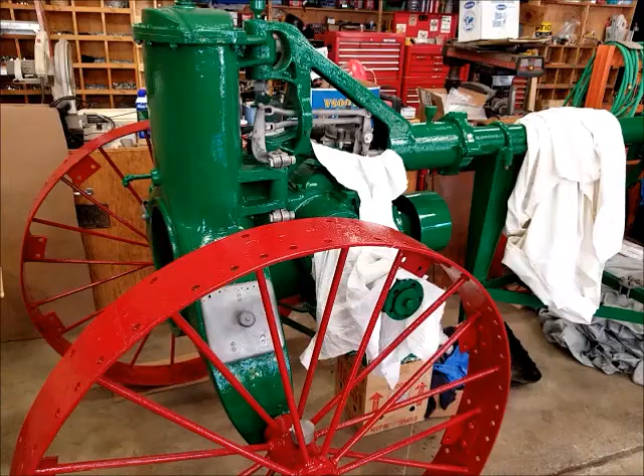So that means back to working on the 612. I got some updates for you. I've heard news that my buddy Kyle is working on these final pinion drive parts for me, and he's hoping to wrap them up in the next week or two here and get them shipped off to me. So that'll be good news, we get them back, we'll be able to install that.

I've been working on rounding up a few more things. I got the new radiator hose in. I ended up going with the red because I think that'll look pretty sharp against the green, little contrast and a little bit something different. It's actually more of an orangey than it is red, but that's the vintage color I guess they were. So I think that's pretty cool. I got a chunk of that.

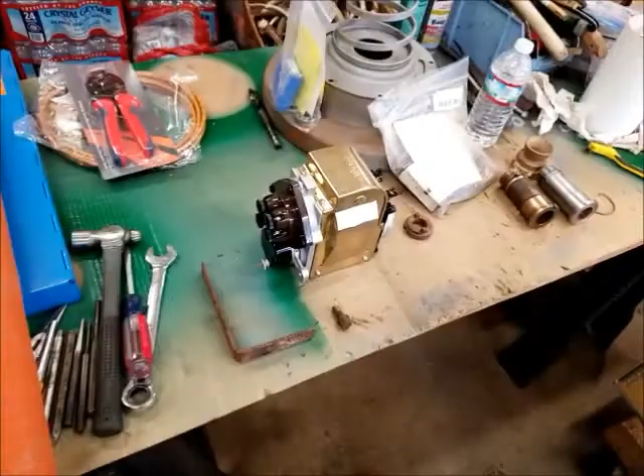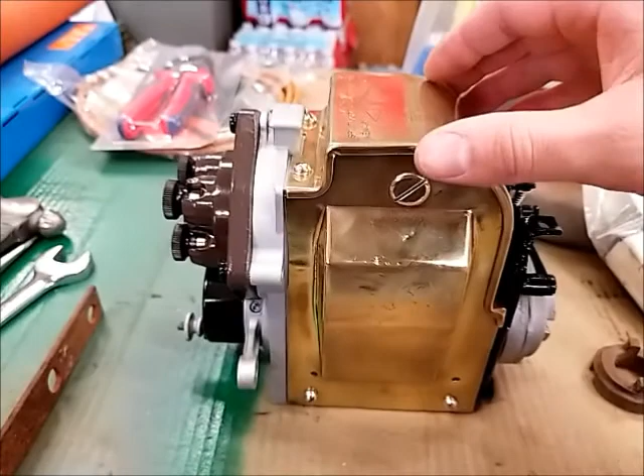Really exciting news, I got my Magneto back from Matt Scott here the other day, and boy does it look nice. Good job, Matt, I am so happy. He completely rebuilt it for me, polished the brass, clear coated it, sandblasted or bead blasted the rest of it, and painted it.

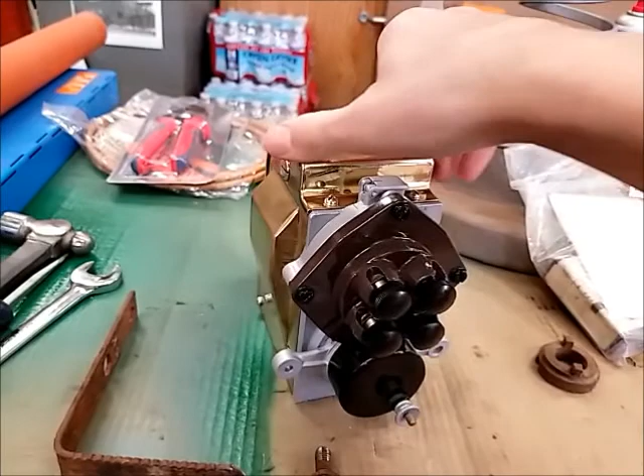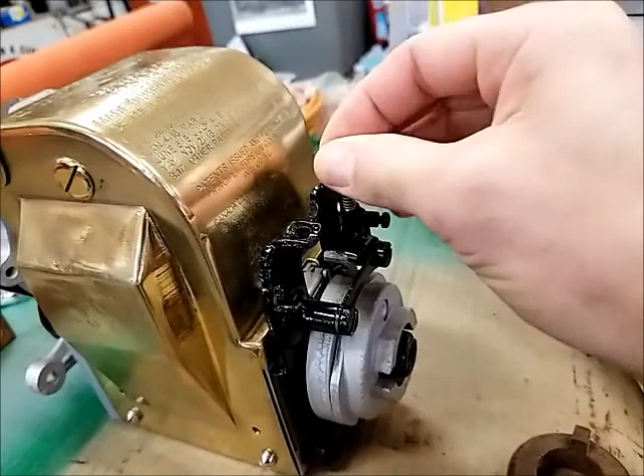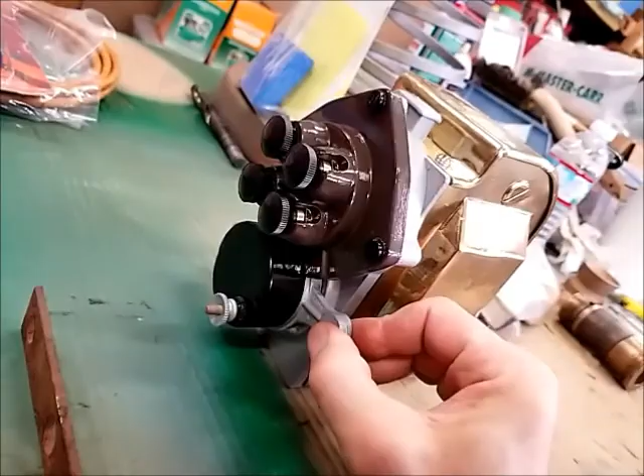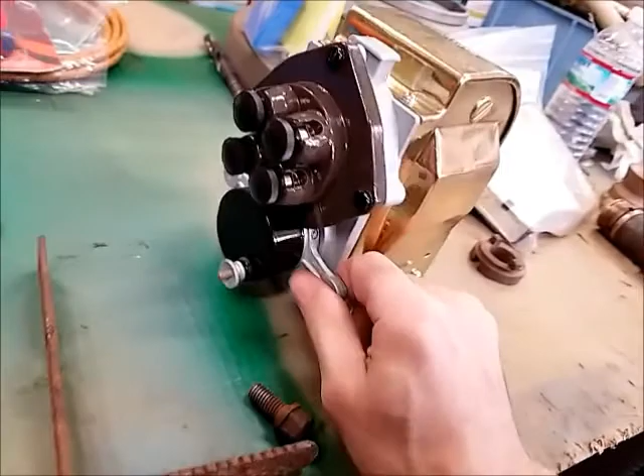It is nice. All the mechanisms work. This is your impulse mechanism here, goes back and forth to catch on the dog there. This is your advance and retard mechanism here. So this bracket here mounts underneath the Magneto, and then there's another arm that I'm missing that bolts on to this and ratchets on these little teeth here.

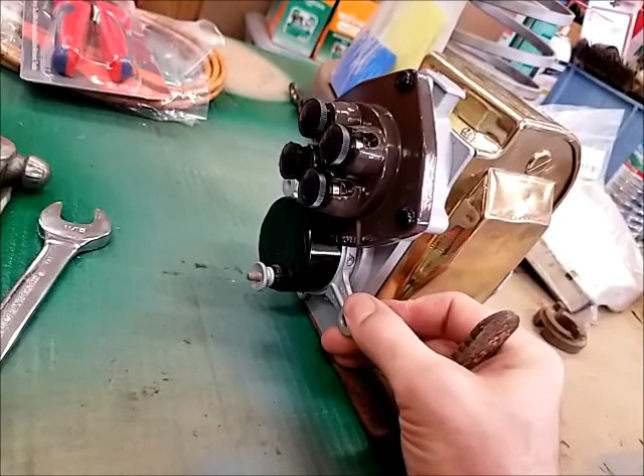So I'll have to fabricate that arm. Talked with Norm last night and we'll see if he can make me up a little blueprint or something, because he has an original one, so I can kind of reverse engineer it based on that.

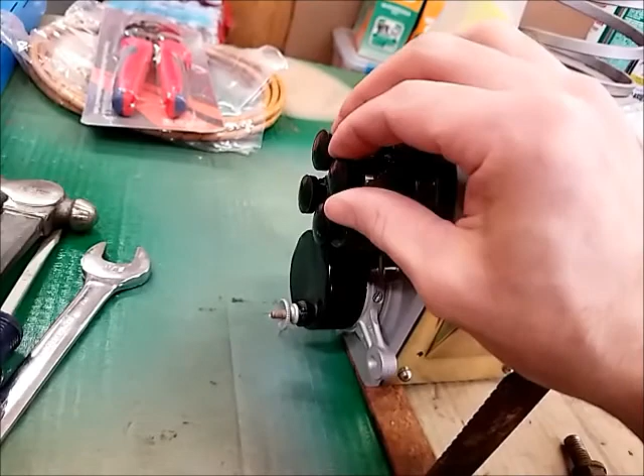This is the coupling that drives your Magneto, it goes to your governor. Have to clean that up yet. So basically the mag is ready to go. We can do our mag wires and stuff then, spark plug wires, when we get to that point.

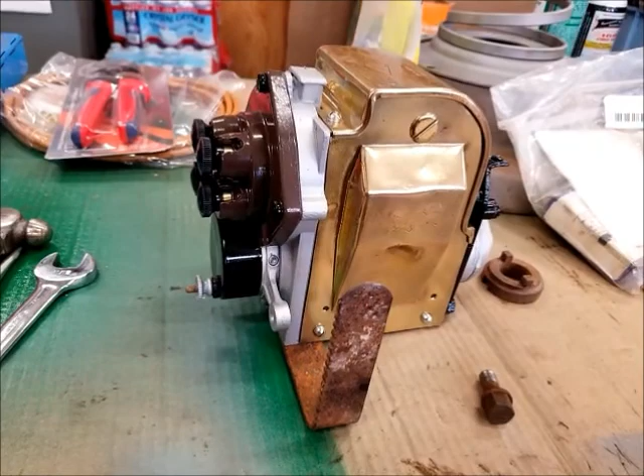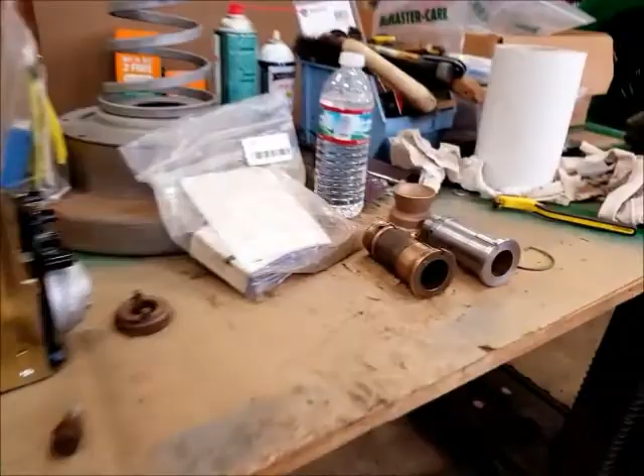This is where your kill wire hooks up to ground out the mag to kill the tractor. So the 612's never had an actual on-off grounding switch by the operator, to my knowledge at least. You'd have to physically get off the tractor and ground out your impulse here, or your advance retard here. But for safety reasons, most everybody puts an actual switch somewhere back by the operator, so if something goes wrong and you need to kill the tractor, you have a switch here at some point.

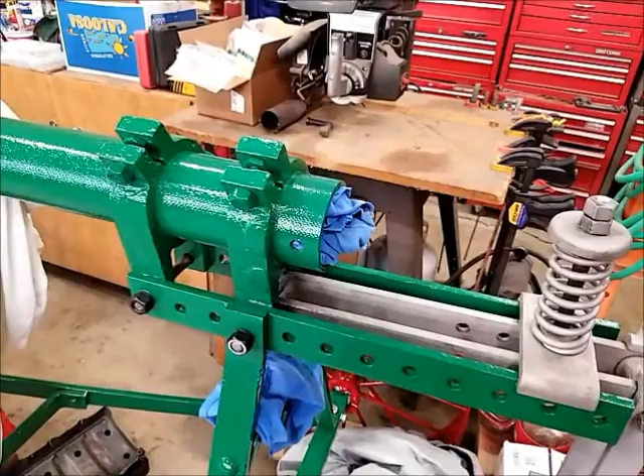I haven't figured out exactly where I want to put mine yet. A lot of guys will put them on that throttle quadrant casting here, so that's most likely what I'll end up doing. But I'll try to come up with some type of a switch that kind of looks vintage, doesn't stick out like a sore thumb. So if anybody has any really good ideas on what kind of switch I could use for there or how I should do it, I'm all ears. Hit me up, leave a comment below, or let me know.

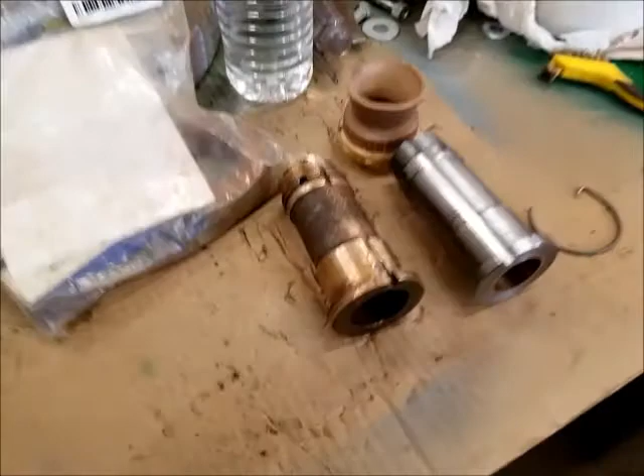We also got back some new clutch parts, Matt Scott made them up for me as well. So this is the original part that he brazed up and remachined because it was all worn down, if you remember. That looks really nice. This was the original part that it threaded onto, and there was enough things wrong with it that we decided just to fabricate a new one. It was easier than trying to fix the original.

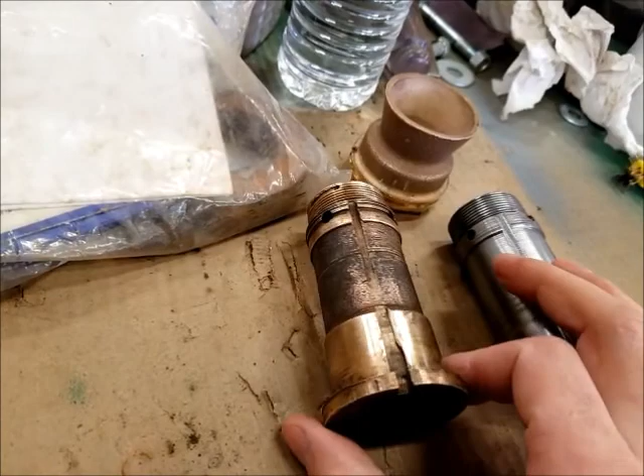So the original one is bronze or brass or whatever it is. We decided to make it out of some steel and just put a bronze insert in it, just to make life a little easier and a little less expensive. And what I really like about Matt is that he used what he had available, and what he had available was a chunk of axle from a 2035 Allis. So that's what this part is actually turned out of, a vintage piece of steel. I find that kind of interesting.

So this threads onto here and then goes into the clutch. Now that I have this back, I can start test fitting, dry fitting some more of the clutch here and make sure everything's going to work. We'll have to make a new lock wire because Matt discovered that that was the issue with this wear point, because the original hole is here and it wasn't in that hole.

Reason being is that this lock wire was broken off. It's not deep enough to engage through that part into this part. So that's why it had moved and shifted and it was wearing funny. So I'll have to make a new one of them.

And then if everything checks out right as far as fitment, he didn't do the final drill through into the new part. He wanted to make sure everything was right, so I'll do that. Because if we need to adjust, say this distance is a little bit off, I could always put a shim in here or have it machined back a little bit farther to make, if something doesn't come out quite right.

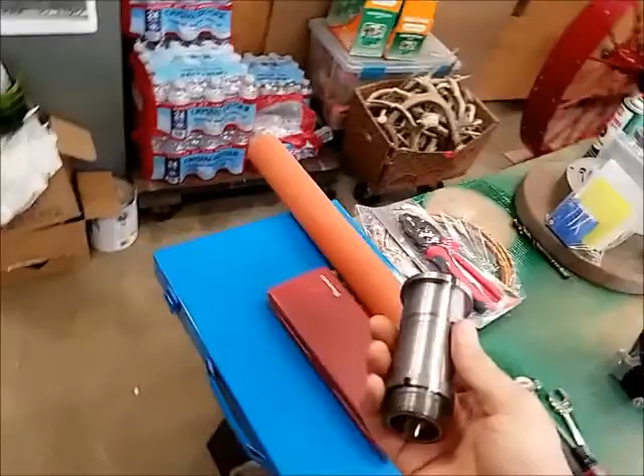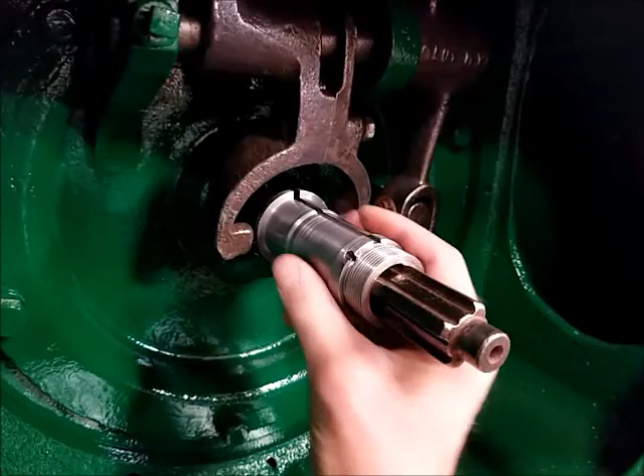But we basically reverse engineered it so it should come out right. So the reason for those bushings is that it doesn't really ride on, but it kind of does ride on your input shaft for your transmission here. It's kind of floating on there, so that's why it's got to have a really nice fit there too, Matt. Good job. We measured this to make it come out right because the old one was very worn on the inside as well. So that should be good.

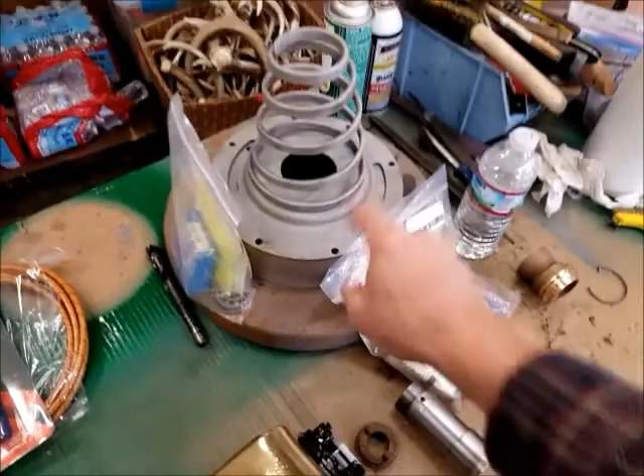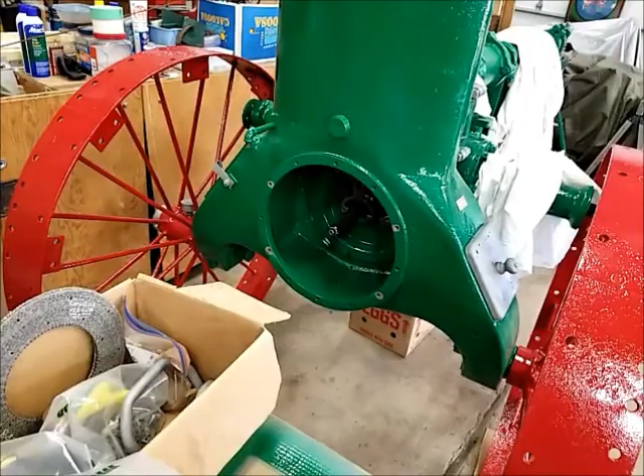I talked to Norm, looking at the spline here reminded me. I talked to Norm last night, and he's working on making the clutch driven disc yet. He's got the part off to the foundry to get a new one cast, and I'll have to get him some measurements for my spline because we're going to make the new spline fit the worn old spline to take up the slop there. So yeah, lots of interesting stuff going on. Check back with you guys later.

Okay, a couple more little small wins. Put some jam nuts on the back of these clevis yokes. They never had it when I took it apart, but I think they probably should, so you can lock it tight. Seems like that it would be correct. I installed these little push button oilers for these pins on both sides. So that's done.

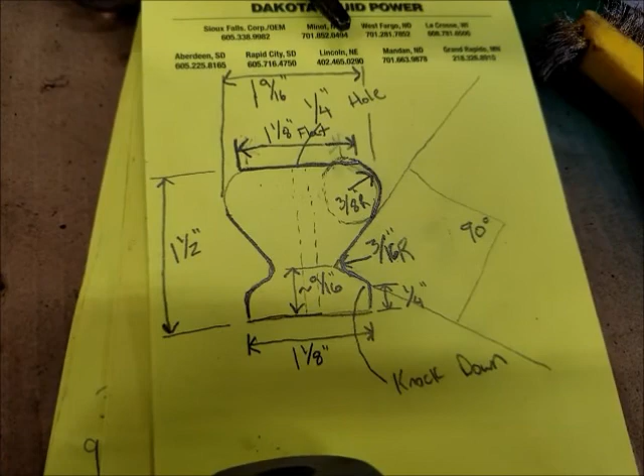Here's a little blueprint of this toolbox and clutch access door knob for anybody that might need to make one. I know Roger wanted me to make a little blueprint for him. He has to make a couple for his tractor. So it's flat on the top, of course flat on the bottom. It's a 1/4-inch hole through it, and there's the rest of the dimensions there. This top radius actually goes a little bit beyond the top because it's flat.

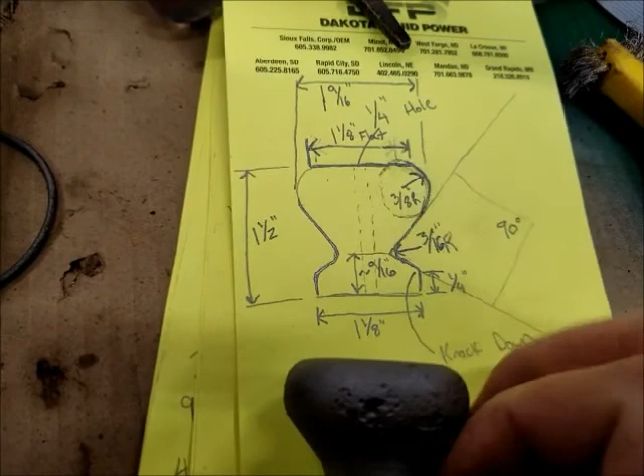Oh, bummer. We've discovered an issue. Small setback here, but nothing we can't deal with.

So when the mag came with this tractor, the arm had been cut off on that mag. So when we redid it, of course, I wasn't really thinking about that. We just assumed that it was a farmer fix or something, had been hacked up. So Matt put on a good double arm, complete one. And that's even what the parts breakdown shows and everything. So we just assumed that was the correct thing to put back on there to make it correct and original. Well, turns out that was hacked off for a reason.

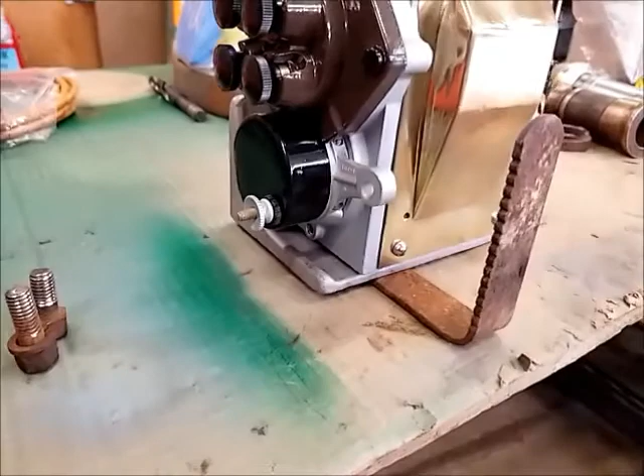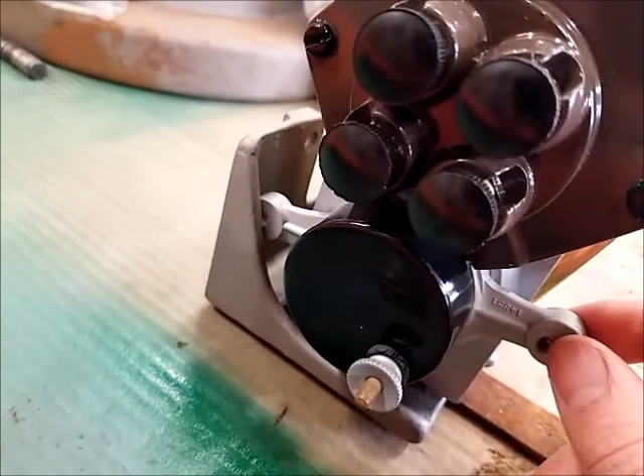It only needs this outer arm, like we talked earlier, to engage on the lever here. And here it is all mocked up how it actually would go, and then the bolts bolt up through the bottom, through everything to hold it all together. So, with this full arm, there's interference issues. That arm hits the casting here before it can go back far enough for the holes to line up to bolt it together. So there was a reason that that was cut off.

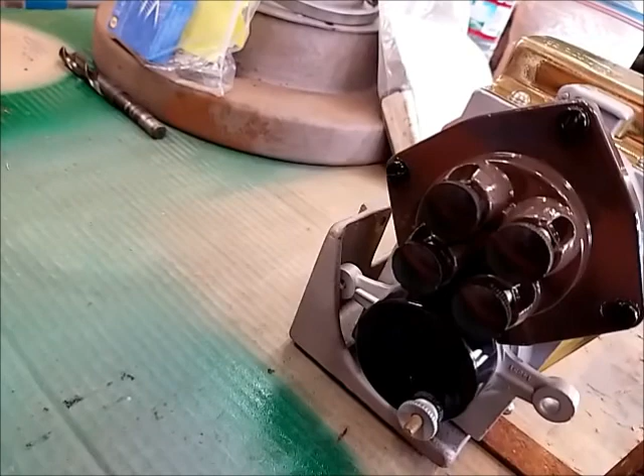So Matt's gonna fix up that other arm for me and send it to me. I guess it's not a big deal to swap this out. He was saying that I should be able to do that here. You don't have to take the whole Magneto apart or anything to do that. So we'll get it straightened out, but it's just kind of a bummer. I wish we would have thought about that before he went through all the effort of fixing this all up with this arm. But oh well, lessons learned, I guess. So future reference for other 612 owners out there: can't have that arm, won't work.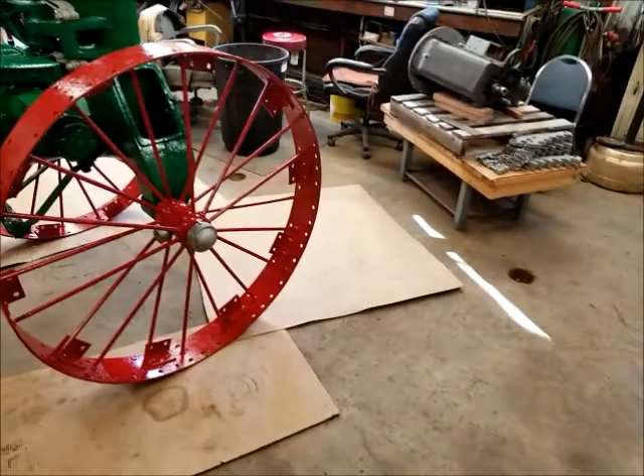All right, moving on. What I'm trying to do here is turn this around and back it up to reposition things in the shop. So when I get to the point of dry fitting the clutch onto the engine, and then dry fitting the engine into the tractor, I can utilize the gantry crane to put it on the front here. Where the tractor was positioned over there, I couldn't use it. So we'll see if I can get this thing turned around.

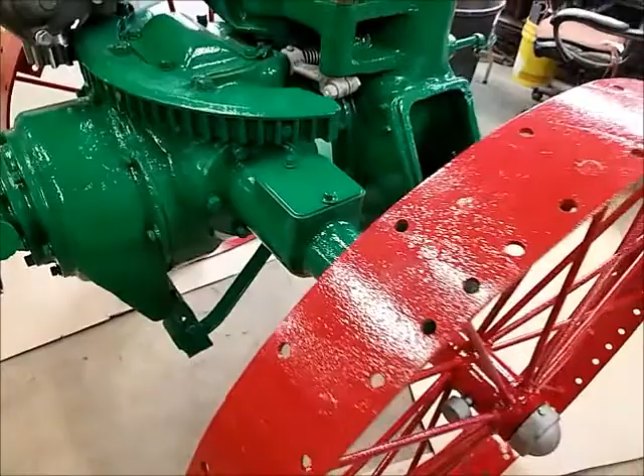It actually rolls pretty easy, kind of surprising with no lugs or nothing on it. I'm trying to keep it on the cardboard to keep from messing up the wheels any more than necessary, at least until it's done. We'll see if I can finish parallel parking this thing. We're getting there, I think it's going to make it. Have to do a couple of wiggles, but we'll get her turned around.

Got her all parked, shop put back in order here. So now you can see how it'd be a lot easier now to take the engine and put it into the tractor with the tractor in this location. And you get to see the other side of the tractor now. You've been looking at the left side of the tractor for months now, now you can look at the right side.

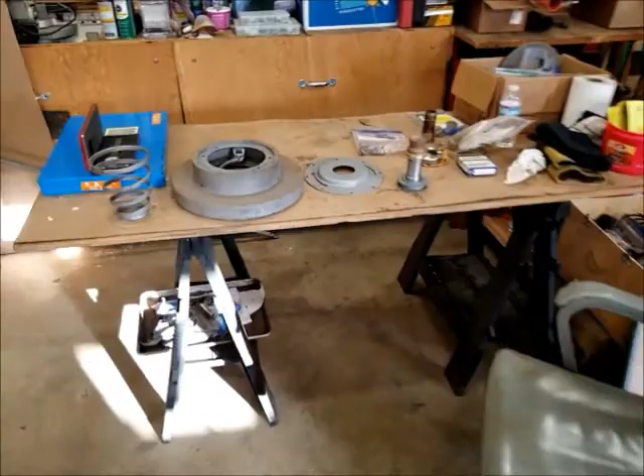I was looking at the clutch parts here a little bit more now, kind of trying to figure all this out. Looks like this should work. So I got the pulley part that the spring rides up against onto the new clutch part Matt made. That's a nice fit now, not sloppy like it was before because the spline, the keyway, the slot, whatever you want to call it, is nice and new.

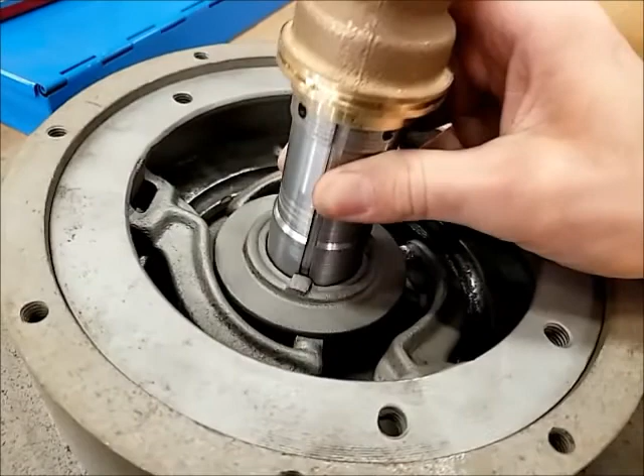That should be good. I'm not even sure what the next step is going to be here, to be honest. I'm trying to think things through and figure out how I want to test fit all this. Maybe the next step would be to actually put the flywheel on the back of the engine and see, because those studs stick through here. I guess kind of see how that works in relation to this, because that'll limit how far it can go back. So it'll probably sit something like this, I'm guessing. I don't know, like I said, I'm not really sure what my next step is. I'll have to think about it a little bit.

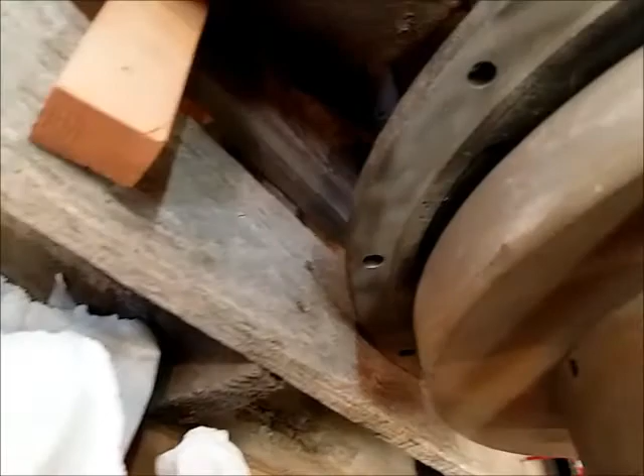Flywheel is on the crankshaft. I chased all the stud threads before I put them on there, and as suspected, these are drilled with one stud slightly out of alignment, so the flywheel will only go on in one orientation. That makes sense because they've got those marks that we showed previously for timing the engine. There's one there, 1 and 4, and 2 and 3, and there's that other hash mark. So it makes sense it's drilled so you can only put it on one way, so the timing marks come out right.

I guess I still don't know where those timing marks line up with. It's not as if there's a pointer, and it's not like most tractors where you look in a little inspection hole in the side of the housing and look for that, line up the timing mark in the inspection hole. So that's a good question I hadn't really thought about until just now. Anybody that knows, let me know. I suppose I could read through the manual, maybe it says in there. I'll have to do that tonight if I think about it.

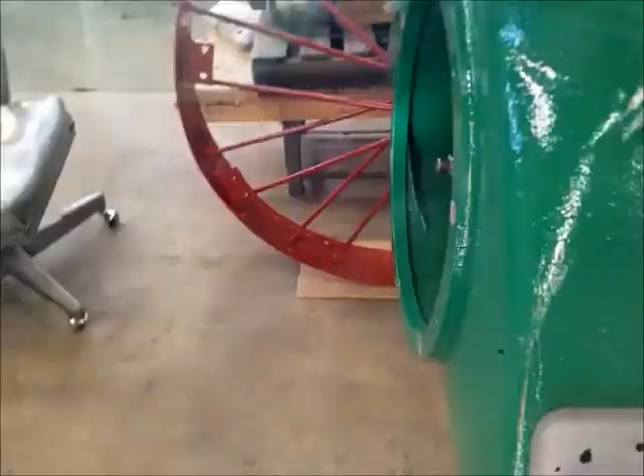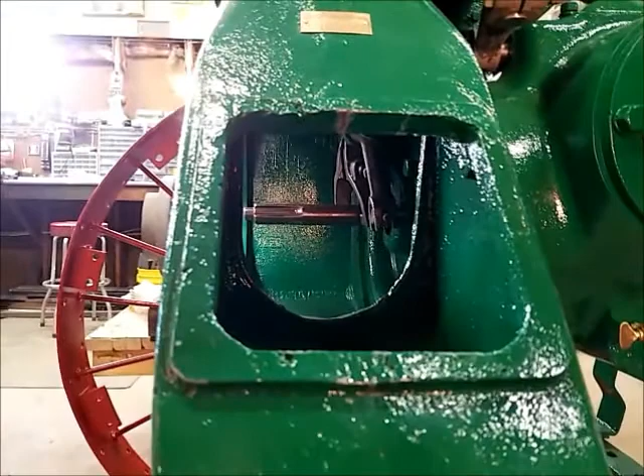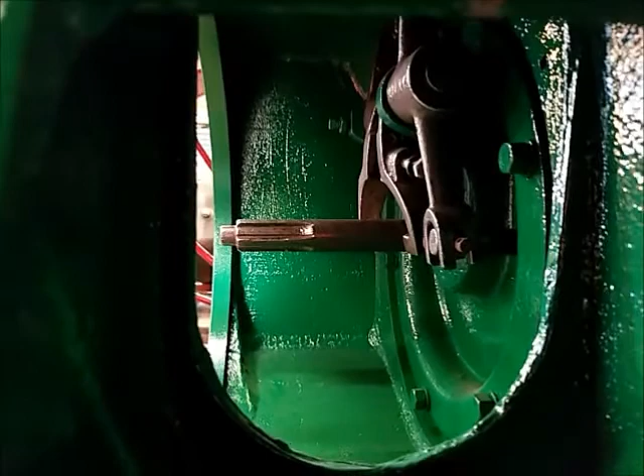I'm assuming it's probably looking in through here. I didn't think that through, I'll reach through with one hand. There we go, I'm assuming it's probably looking through this here, but what it lines up with exactly, if there is anything, as far as I know there's no hash marks or nothing in here. If you just go in the center of this opening or what, I don't know. I'll have to research that. If anybody knows, let me know.

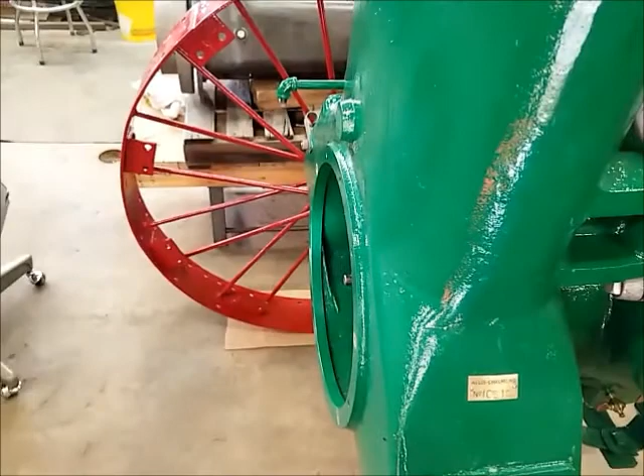But besides that, that's pretty much what I've gotten done here. So I think I'll try the clutch parts in here now, to see how that pulley clears these studs and whatnot, because like I've mentioned before, I'm at the point where I'm putting together puzzle pieces here that I didn't take apart. This was all completely taken apart, the front of the tractor, engine, everything, when I bought it. So I don't even know how all of this goes and fits. I'm figuring it out as I go, so that's making things a little bit more tricky. Okay, I think I gotta quit thinking about this for a while.

My brain's starting to hurt. I don't think I can fully figure this out until I have that center driven disc back. I thought I could do it by just putting some shims to replicate the thickness of that in here. But if I'm looking at this right...

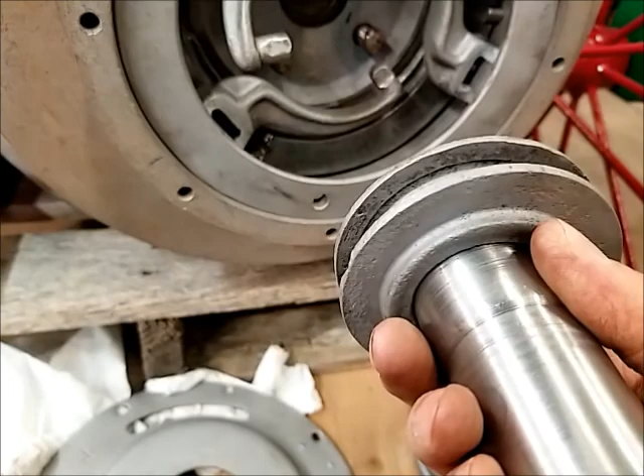I think this actually seats up against that driven disc, because the spring is pushing back on that when this is in here, pushing this way. So there's got to be something that stops this. And obviously that driven disc would be what's behind this pulley, so that must, at least to a certain extent, seat up against that. Am I thinking about that right?

I'm not sure. Like I said, I've been sitting here staring at this, trying to figure it out. Thought I had it all figured out, but now I'm doubting myself. So I think I'm going to walk away for a while. It's about supper time anyway. Maybe we'll come back out again tomorrow and work on something. Not sure what.

We'll work on something. Well, I do think I'll probably end up having these ends of these linkages built back up too, because they're rather worn, and I think that might be an issue, because they're not worn evenly. That one's a lot more than these two are. So that pulley might want to cock in there. I think I'll have to look into that a little bit. Not sure if these are cast steel or cast iron, because that'll decide what we have for options to fix that, build them back up.

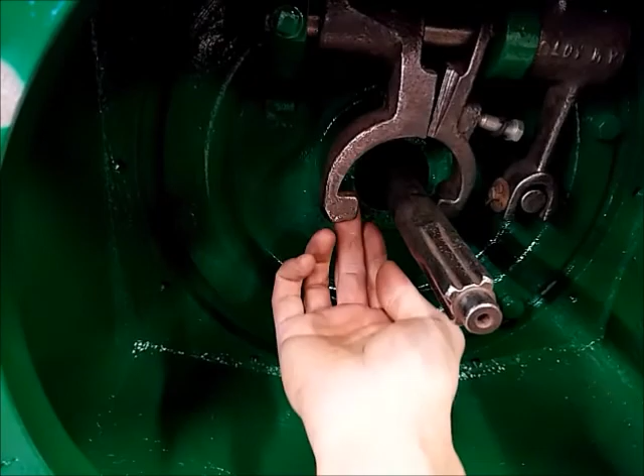And then along with that, same logic, possibly the back of the throwout here as well, because that is worn too. And at the very least we'll probably have to remachine these, but probably would be best to build them back up to the proper specs. I don't know, lots of stuff to think about here. I'm tired of thinking about it. I just want to put something together, but everything you do, you got to think about something else before you put it back together, because everything works with everything else, and if one thing is wrong, everything is wrong.

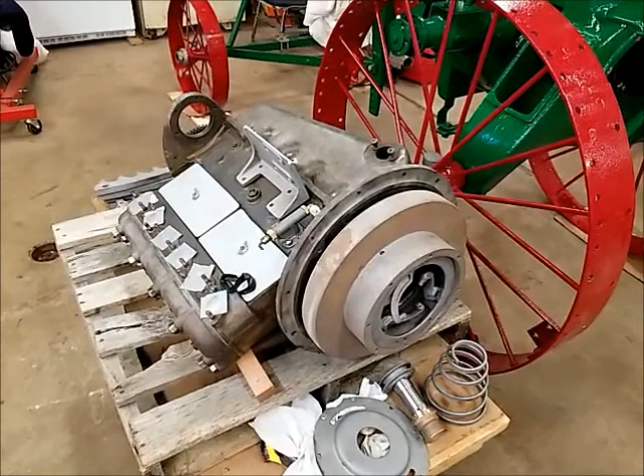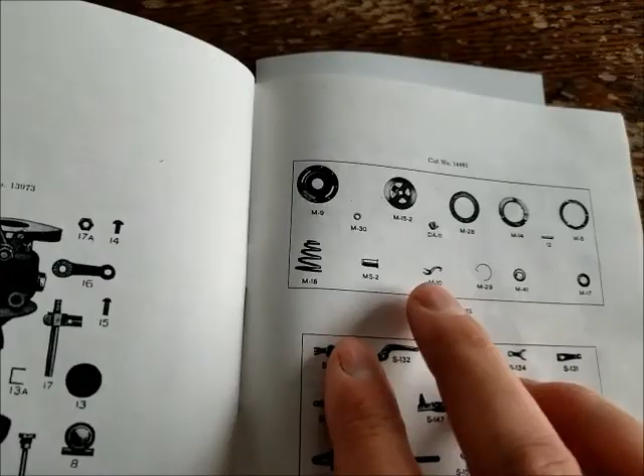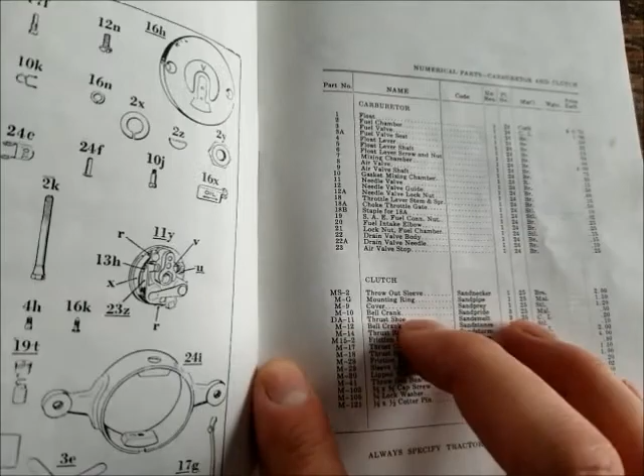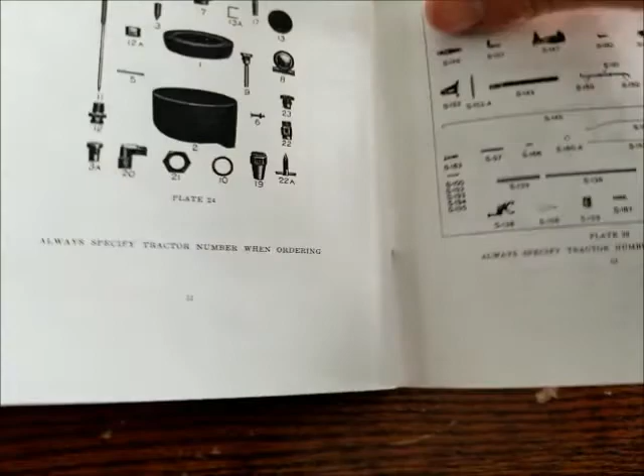Those clutch parts, that M10, the three little arms, M10, they call them bell cranks. They are malleable, and the throwout fork, S138 clutch fork, is cast steel, so that makes life easier as far as repairing stuff. I'm pretty sure you could weld cast steel. Malleable I'm not 100% sure on, but at least it's not cast iron. And I'm thinking you could also probably, in this situation, braze those worn ends up and remachine them down, and that would probably be fine too for this application.

But just figured I'd share that little bit of info with you. So I'm pretty excited here, guys. I just solved one of life's mysteries, I'm pretty sure.

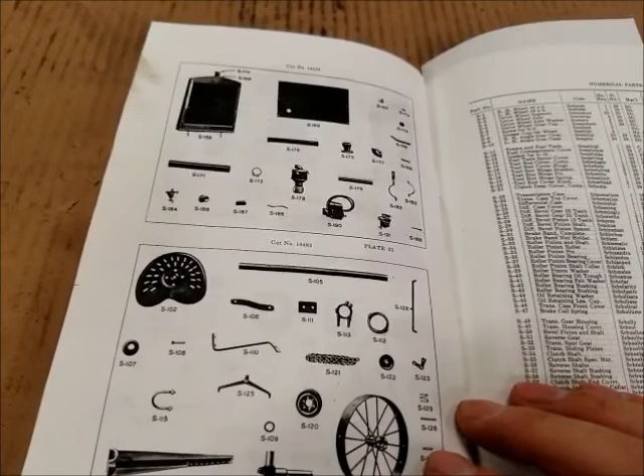So looking through the parts book here today, trying to figure something else out, and I got sidetracked. And I got to look again at S187 and S188, which are the roller pin remover, cast iron, and the special screw for 188, which is just steel.

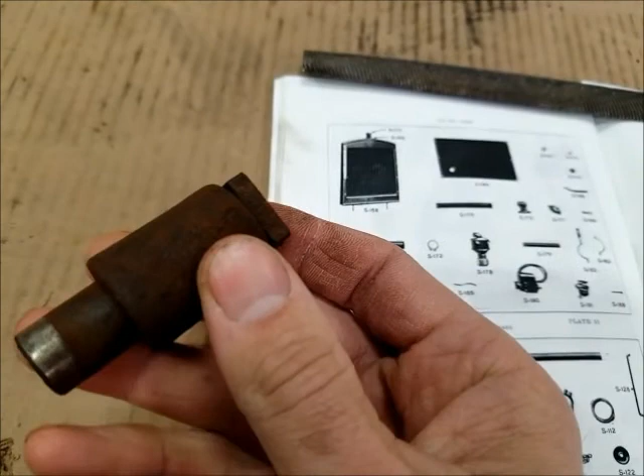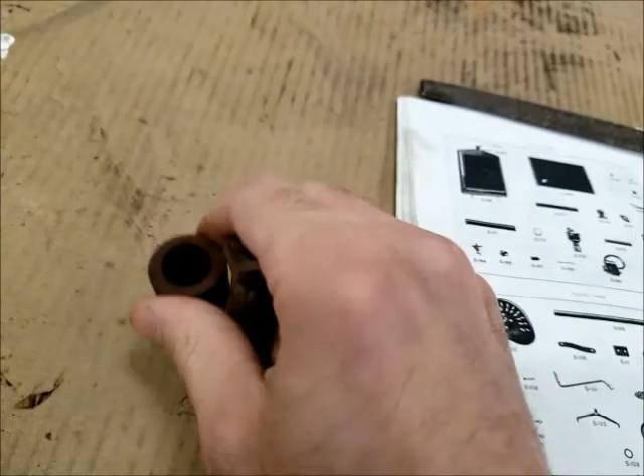So, why am I so excited? Well, I never really knew what that was. I mean, we knew it was a tool to remove the pinion, final pinion drives. And we figured it was a threaded bolt with some type of a standoff that you would put on the end of the axle, and you put your bolt in and nut on the bolt most likely, and use it like a puller to pull these out so you can replace them when they get worn, right? Okay, nothing too special about that. But obviously they had a special tool just for that, but you can't really make out what it is in the parts book. It's kind of a square looking thing, but that didn't... whatever. I didn't think much of it.

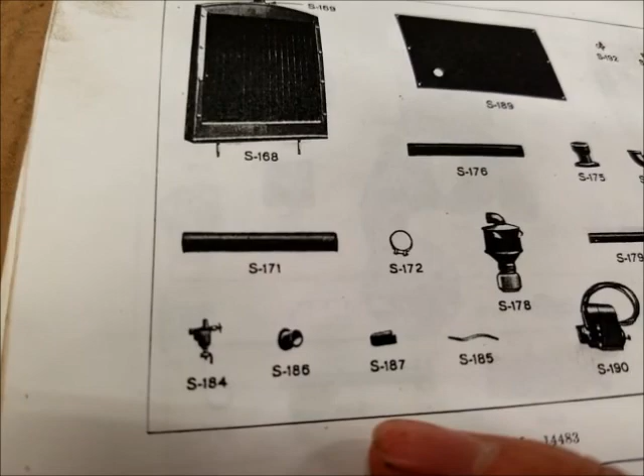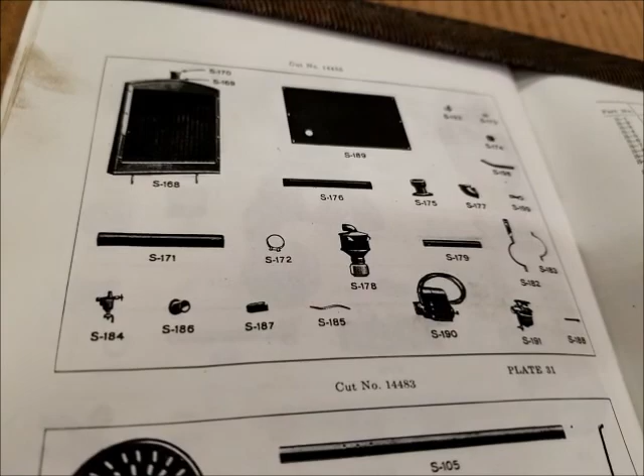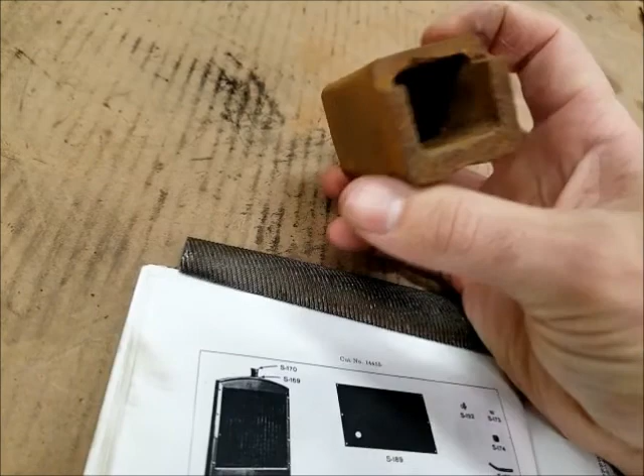Well, it finally dawned on me today. If you remember way back in some of the videos, this tractor was obviously a basket case, and it came with a bunch of jars of miscellaneous hardware and stuff. And some of the stuff I don't think even went to the tractor. Well, this was one of those things. If you remember me showing you that in one of the early videos, I kind of said, I doubt this is for the tractor. And I've always just thrown it aside and didn't think much of it.

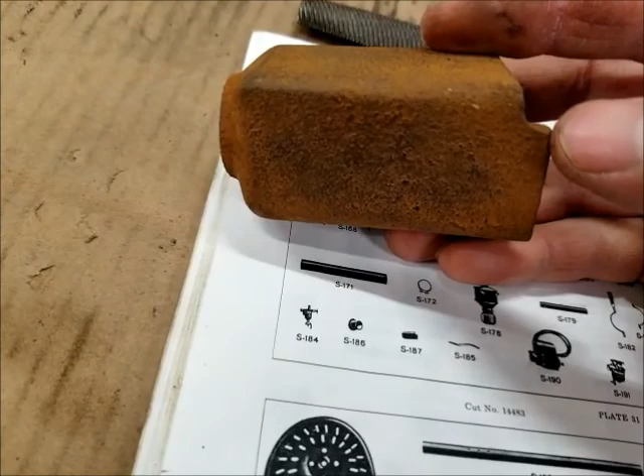Well, then it dawned on me, that sure looks like the picture. Square, it's got the little notch in the back there. It's cast iron, like the parts book calls for. So I dug it out here today, and sure enough, it's the right size for those final pinion parts to go in. It's the correct depth for that to pull them out.

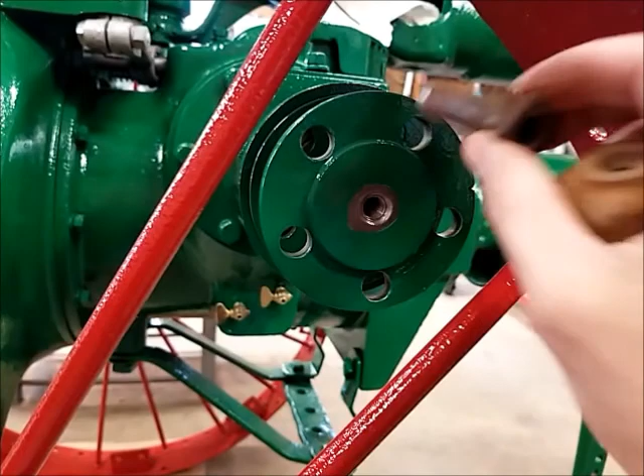So how this would work is in your final drives here, when these would be pushed, installed into place, you would take your special factory tool, put it on here, and that's why that little notch is there to clear that part of the axle.

You put your special bolt through there, thread it into the end, which is tapped. The factory ones are tapped. So you thread your bolt in there, or threaded rod in there, and then you have another nut on that threaded rod.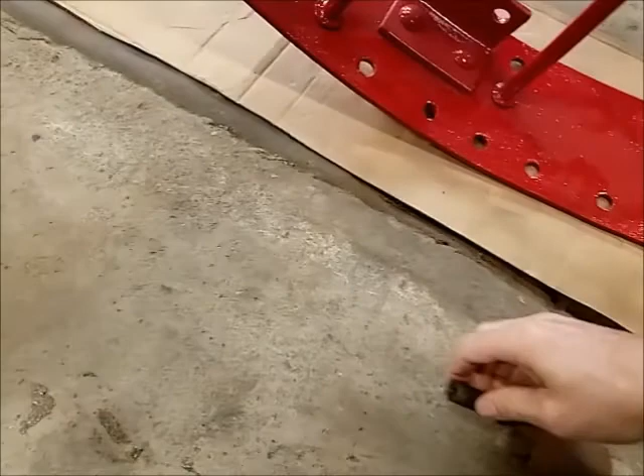And you tighten up that nut, and it would pull it out of there, and it would be inside of here.

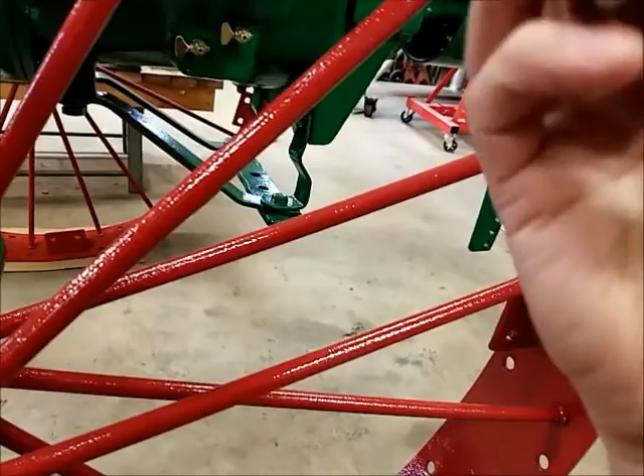So maybe I'm just easily amused, but whatever. But it's like, that's pretty awesome. I got a factory tool here.

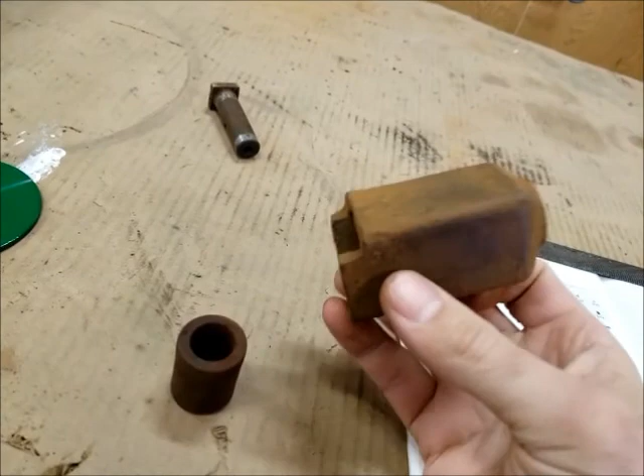So I'll have to run this through the sandblaster and see if I can find any really faint part numbers or anything on it. I have not. I gave it a quick little wire brush here, but I don't see any raised casting numbers. But whether there's maybe a faint stamped in casting number somewhere is still a possibility.

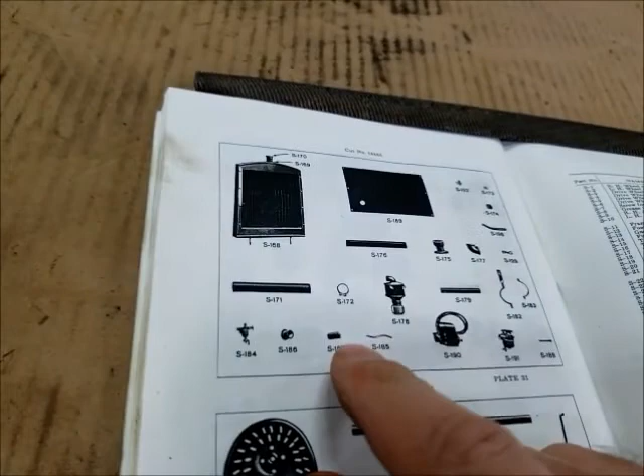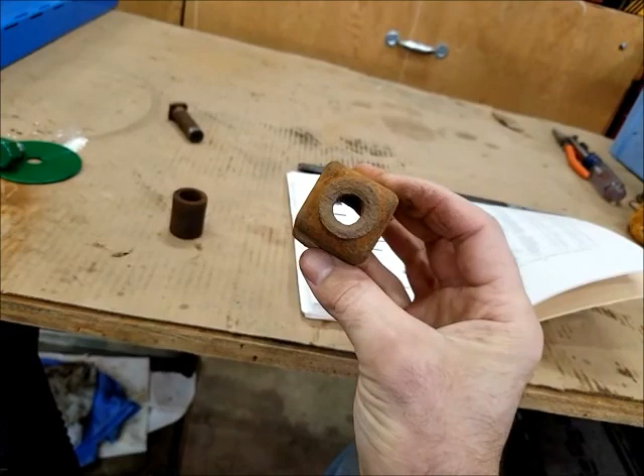So that's pretty awesome, because to my knowledge, I might be the only person that has one of these, because everybody else I've asked about this special tool, they've all given me the old 'I don't know, nobody's ever seen one' for an answer. So there you go. Now everybody knows this is what it looks like.

Guard that with the special stuff from now on. I'll have to sandblast it up and paint it up and put it with the rest of the tractor. I suppose maybe we'll have to consider, since I have an original, maybe getting a few more of these cast made up for other 612 owners.

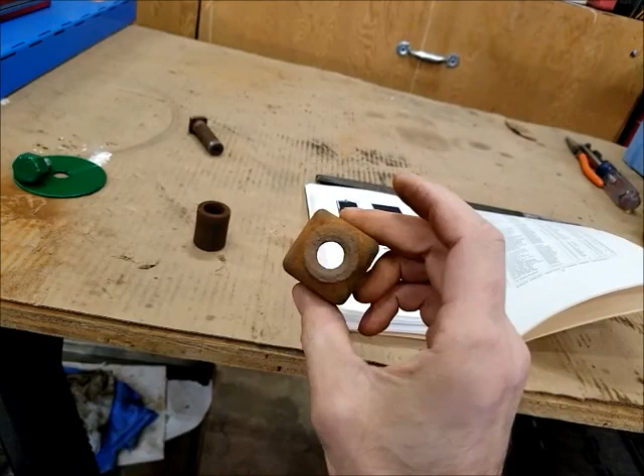But yeah, let me know what you think. Is that what I think it is? Sure looks like it to me. It's way too much of a coincidence otherwise.

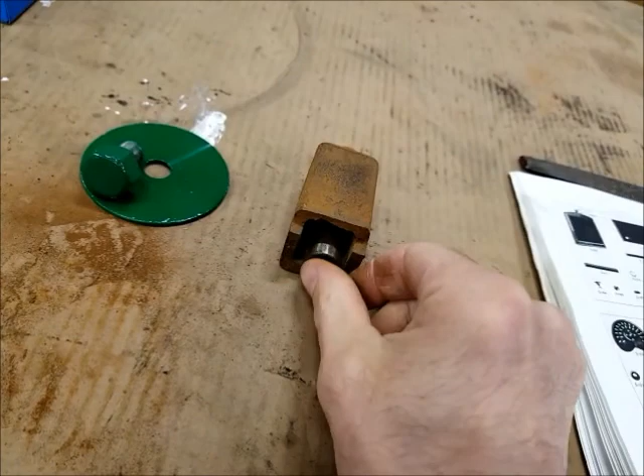And I suppose it's square, so that way, as it's coming out, it doesn't start spinning. And instead of pulling it, it doesn't start spinning. And I imagine that's why it's square shaped, because it would have been a whole lot easier to make just round.

So yeah, pretty awesome. With that, I think I'll probably sign off for the week here.

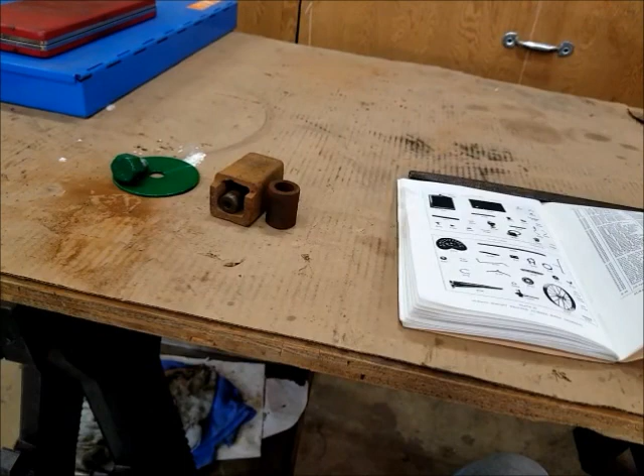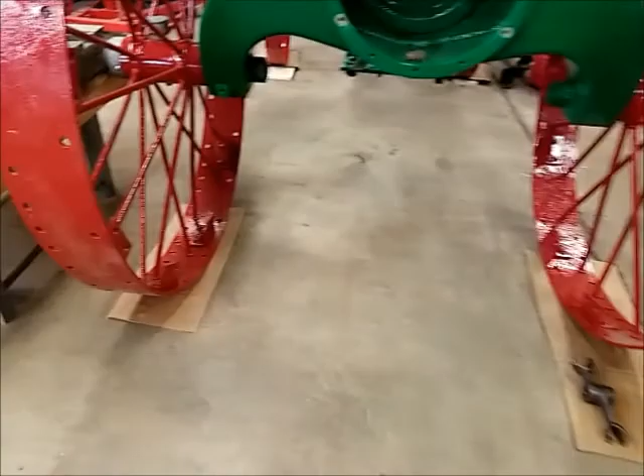I've been kind of just trying to figure out a few more things as far as clearances, and figuring out clutch stuff, and figuring out repair options as far as these worn arms. Just kind of a lot of planning.

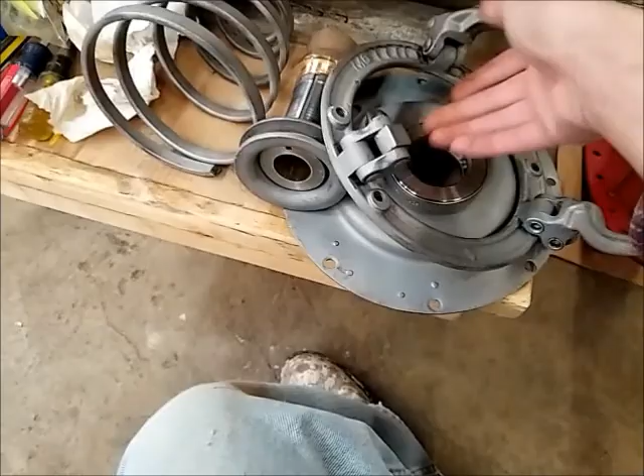I think I probably mentioned this in the past, there's a keeper plate that, you know, your pilot bearing is pressed in there, and then there's a keeper plate that goes on to keep that bearing located in the flywheel. And that part I was missing, so I got a blueprint from David Dickmeyer, and I'm going to work on making up one of them.

So I've kind of been trying to figure out that, and figure out making up one of them. So that's kind of on the to-do list.

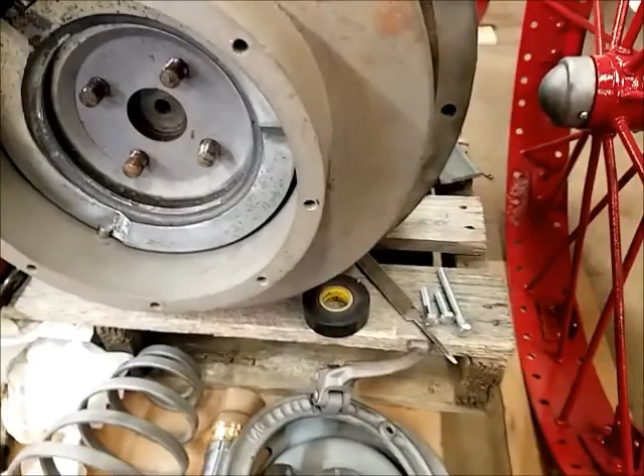I started to measure up the spline size here and how worn things are, but I need to bring my micrometer out because I can't get in here with the calipers the way the tractor is shaped.

So I'll have to measure that up in the near future to get those measurements to Norm, because it sounds like we'll probably have him, as long as he's making that driven disc, to put the splines in and do all the final machining on that at the same time, since he has more machine tools available at his disposal than I do here. So, but yeah, that's kind of what I've been up to.